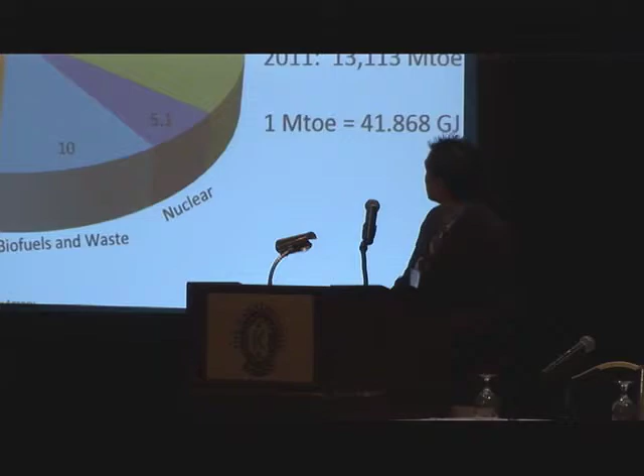Okay, I believe, there we go.

So chemical looping is an interesting technology. This presentation will differ from all previous presentations because chemical looping is still most definitely a technology that's being developed, but every sign does show that it can lead to commercial scale demonstration operations. Currently, as all these chemical looping projects occurring throughout the world continue to scale up successfully, this technology does have the ability to completely transform how fossil fuels are utilized.

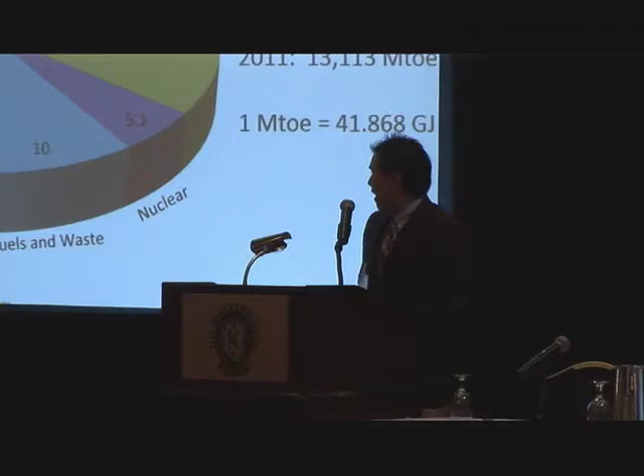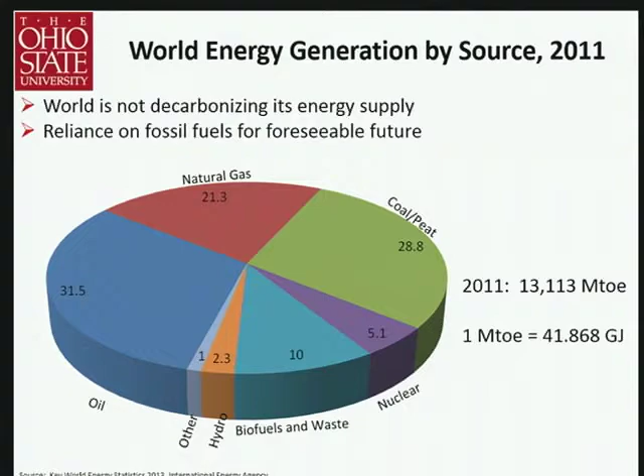First, though, it's important to take a global perspective of how energy is consumed. If you take a look at this chart, it's very obvious that fossil fuels dominate our primary energy source. Given the current portfolio for energy, oil, natural gas, and coal comprise about 80%, it's very clear that for the near future, carbonaceous fuels will continue to dominate. The world is not decarbonizing our energy, and we aren't shifting towards renewables to any great extent.

Now, I realize that CCS, CCUS, CCGS, CCUGS, whatever you want to call it, is not a viable option for reducing CO2 emissions in its current state due to economic challenges and difficulties. However, that doesn't mean that in the future it can't be or won't be, as research continually develops and advances.

So everyone here knows the purpose of CCS. Tom and Jordan did a fantastic job yesterday going over the details of what the DOE is doing in terms of CCS. But the overall strategy does require government regulation and technological advances in order for CCS to be viable.

In terms of government regulation, everyone here knows the US EPA mandates and proposals have been discussed in great detail. But internationally, the European Union has also set up the emissions trading system for CO2.

In terms of technical advances, I did steal this chart, it's quite dated, but I did steal it from the DOE NETL, so if you guys want to prosecute me, you have every right to do so. As you can see, chemical looping is here, and it does show that in terms of what the DOE and NETL believes, chemical looping provides the greatest cost reduction benefit, although we do take issue with that and believe chemical looping is more somewhere in this time frame in terms of commercialization.

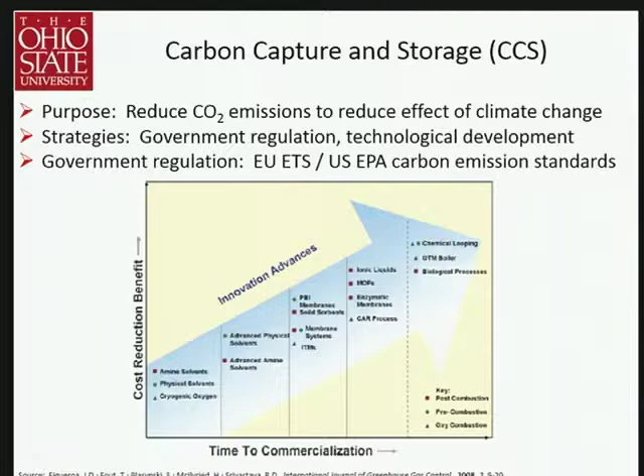So now, what is chemical looping? It's simply a cyclical process where a chemical reaction is divided into several sub-reactions using intermediates. There are two types. One is purely for CO2 removal, and the other, more interesting one, uses a metal oxide carrier particle for oxidation reduction.

In terms of CO2 capture, it's typically a metal carbonate, typically limestone. It's calcined, and then a pure stream of CO2 is emitted, while the metal oxide reacts with the CO2 and the flue gas to form the metal carbonate, and the cycle continues.

In terms of the redox cycles, what happens is a metal oxide reacts with the fuel, and depending on the metal oxide composition and the reactor type, you can get a variety of products, including syngas at any hydrogen to CO ratio you want. You just need to play around with the particle, you need to play around with the fuels, but syngas at a hydrogen to CO ratio at any desired fraction.

You can get electricity through complete combustion. You can get hydrogen. You can get liquid fuels. It just depends on how you decide to set up your reactor system. What you can see is that it's just a complete redox cycle between the metal oxide and the reduced metal.

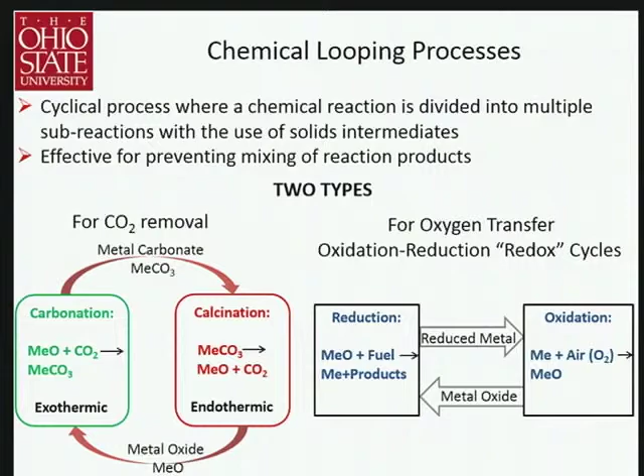The main benefits, there are several of them for chemical looping: it is an inherent CO2 capture technology. You don't need an amine scrubber, you don't need any back-end sort of CO2 removal system. It by itself is inherently a CO2 capture technology.

It provides a highly efficient method for coal and natural gas utilization, where efficiencies can range between 50% and 80%, depending on what products you want. It's fuel flexible. Research throughout the world has tested biomass, coal, natural gas, lignite, pet coke. Everything has been tested.

And it's also product flexible, like I said earlier, where if you want syngas at any hydrogen to CO ratio you desire, it can be achieved. You can produce electricity and value-added chemicals.

The challenge is the particle development. The greatest barrier and the number one failure for chemical looping systems is the particle. DuPont had a maleic anhydride chemical looping system, but it failed because their particle over time failed to continue to provide the oxygen, so they just eventually ended up using an ASU.

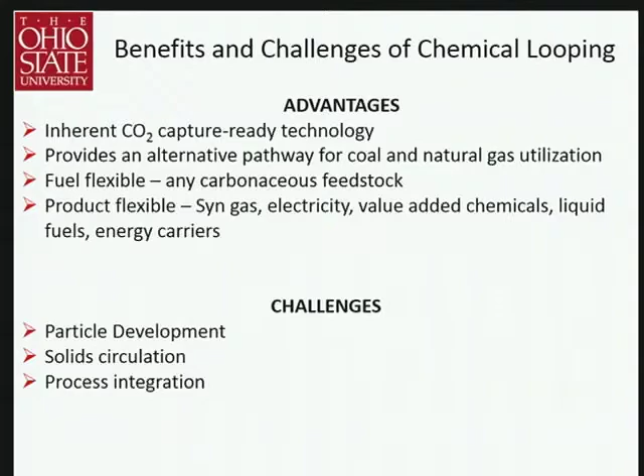The idea of chemical looping isn't a new idea. In the 1900s, the Lane and Messerschmitt process was actually a chemical looping system for hydrogen production, very similar to what we are using today for our hydrogen production as well in a chemical looping system.

The first reaction, the top one, is simply the steam iron process. The bottom reaction is the reduction of Fe3O4 back to Fe using CO. The net reaction you can see is a water gas shift reaction, but since you broke it into two intermediate reactions, there's no need for a water gas shift catalyst. There's no need for breaking the equilibrium or trying to shift it, because there is none. It's inherently performed through the chemical looping system.

In the 1970s, Consol Energy had the CO2 acceptor process, where they tried to use calcium oxide both as a CO2 carrier, such that the water gas shift reaction could move in the forward direction. Plus, since it came from the calciner, which was at a higher temperature than the gasifier, the calcium oxide also provided heat to the gasifier.

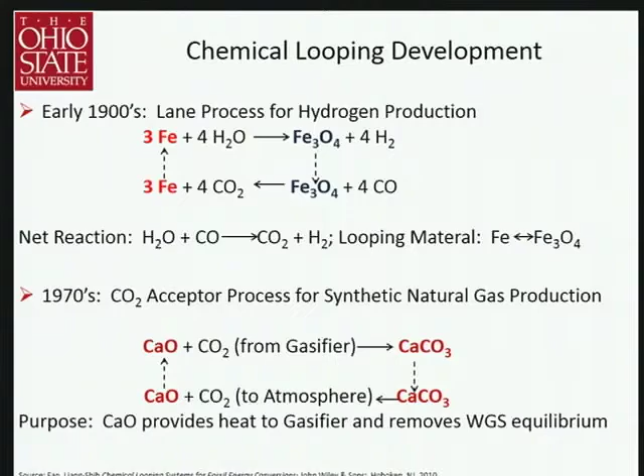So again, there are two types of chemical looping systems. The first one is for CO2 removal, and this has been studied heavily using carbonates, usually naturally occurring carbonates. RTI used sodium carbonate. The Europeans actually scaled up their process to a 1.7 megawatt thermal plant in Hunosa, Spain, using just pure plain limestone, not doped or anything, just limestone from the ground.

And what we do at Ohio State is we actually use calcium hydroxide, so we provide an intermediate reaction step to convert the calcium oxide to calcium hydroxide, and I'll go into that a little more later. Additional solids include hydrotalcites, and magnesium hydroxide as well has been studied.

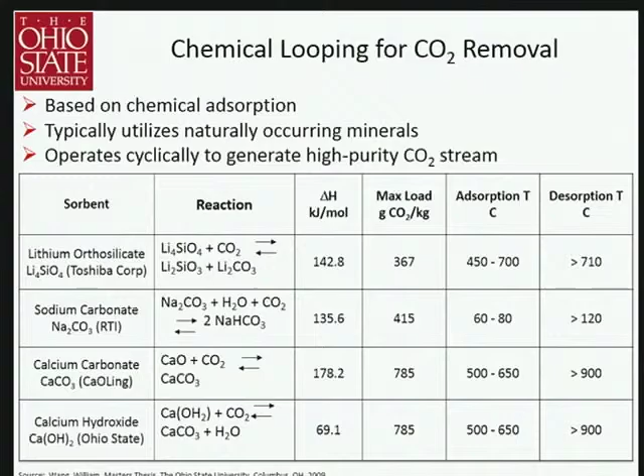So at Ohio State, we have chosen calcium hydroxide because what we've noticed is that it is far more reactive than calcium oxide over multiple cycles. Calcium oxide is known to degrade in cyclical fashion for CO2 capture, while calcium hydroxide has shown a steady CO2 removal. So it's a three-step process, three reactions, all at high temperature.

The calciner is where everything starts to form the calcium oxide. That is then hydrated using steam around 500 C, which is an exothermic reaction, so quite a bit of heat is provided through the hydrator. And then in the carbonator, that's where the CO2 capture occurs, and it continues in a cyclical fashion.

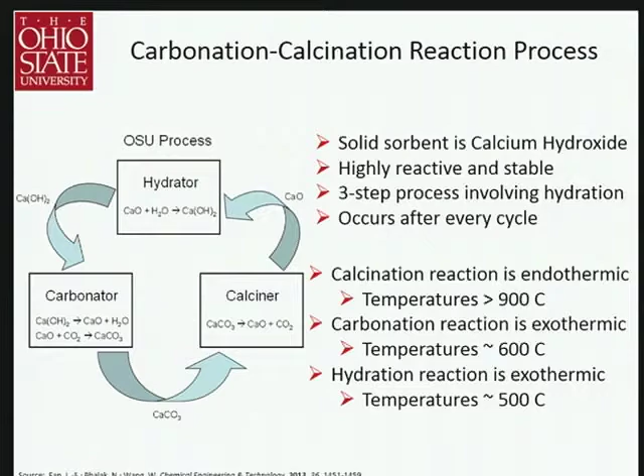We demonstrated this at the 120 kilowatt thermal scale at Ohio State using a coal-fired stoker donated by Babcock and Wilcox, using direct injection of calcium hydroxide and several other oxides into our flue gas to see the removals. This is the stoker grade Ohio coal, and this is the coal flame.

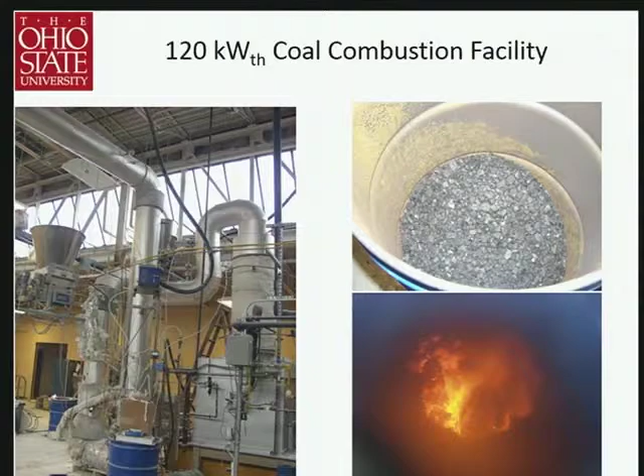The single cycle studies were very successful. Calcium hydroxide showed great promise. This was the cyclical setup where solids were injected up here and then just continued through the cycle. And this is our rotary calciner for calcination.

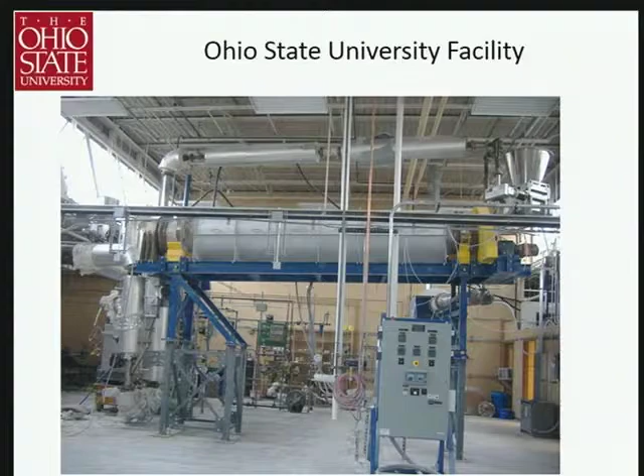What we were able to achieve is 90% CO2 removal at a calcium to carbon mole ratio of 1.3. This can be compared to natural limestone tested by the Europeans, where they need a 10-to-1 calcium to carbon mole ratio for 90% CO2 removal.

Because of the high calcium to carbon mole ratio and the carbon to sulfur ratios, we get 100% SO2 removal using calcium hydroxide, even though we're at temperatures far lower than furnace sorbent injection, and that's just because the calcium to sulfur ratio is at least 50-to-1.

In the carbonator, the residence time is on the order of seconds to achieve the 90% CO2 removal, and we've been able to sustain the reaction for several cycles. This is just a simplified process flow diagram of what is circulating through the system and the energy inputs and outputs.

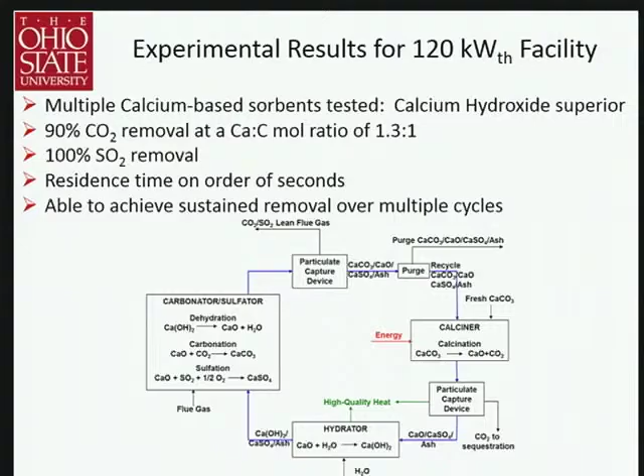I like to call this slide 'what I did over the summer.'

In order to see the effect of process parameters on the carbon capture process, the CCR process as we call it, in terms of energy penalty and materials consumption, I started out with case 11 of the DOE baseline report.

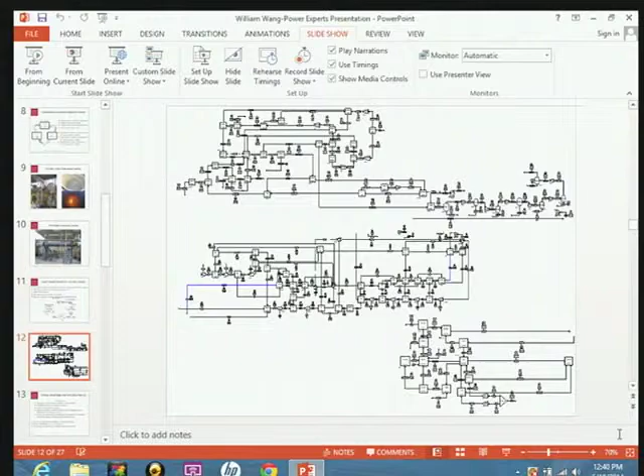So this is the coal-fired boiler here. I apologize, I had to break this up and it's still incredibly small. Coal and air are fed into here, and flue gas comes out. This is the steam turbine cycle, again for the supercritical case, case 11, along with using the QGESS standards put forth by the DOE.

And then up here is the actual carbon capture, where the flue gas comes in, and then this is the CO2 compression. This is the calciner, which operates in an oxycombustion mode, per the standards of the oxycombustion report, again put forth by the DOE, as oxycombustion calciners haven't really been developed yet.

And then the hydration obtains steam from the intermediate pressure and low pressure interchange.

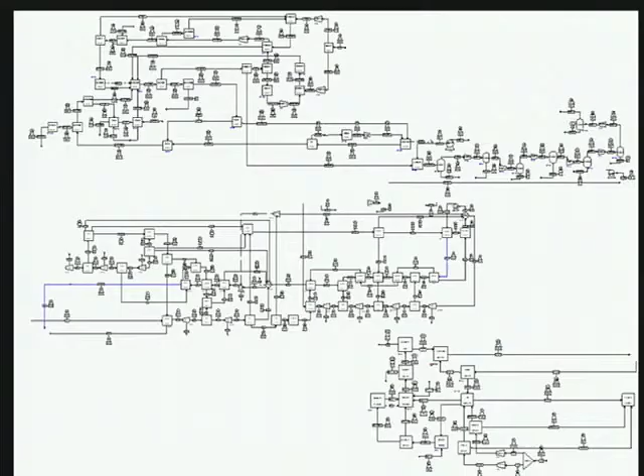The advantages of using this high temperature carbon capture process is that it uses limestone, which is about $25 a ton, very cheap if you get it closer to the mine. Because of the high calcium to carbon mole ratio of 1.3 to 1, our simulations show - we haven't formally demonstrated it - but all acid gases are removed: SO2, SO3, HCl, just because of the trace amounts present and the high amounts of calcium circulating through the system.

The process integration is flexible, where you can use either high temperature or low temperature flue gas. You can take steam from either the intermediate pressure or low pressure interchange, and if vacuum compression or vacuum heat exchangers are developed better, you can also take it from the exit of the low pressure steam turbine, but it is under vacuum at that point.

The energy penalty, steam consumption, and oxygen consumption are all lower than amine scrubbing and oxycombustion. Under the very worst case scenario, the energy penalty is around 25%, but it's usually lower, 15 to 20%, 15 to 25%. That's again because of the amount of high pressure or high temperature heat available through hydration, the heat of reaction for hydration, and the cooling of the flue gas from the carbonator coming out at 625 C down to stack temperatures.

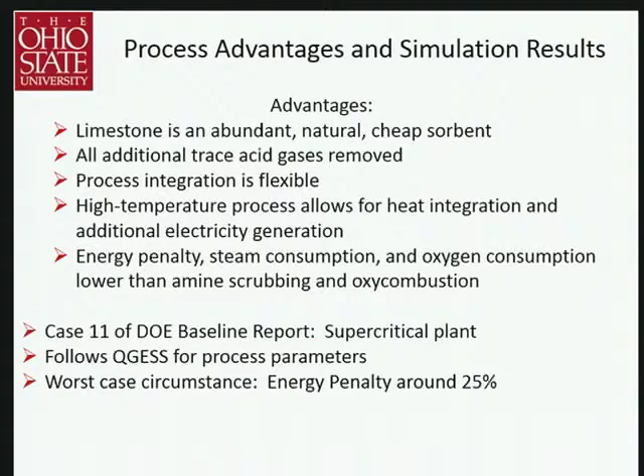The second type of calcium process is a pre-combustion one, where the calcium hydroxide now actually serves two purposes. One, it provides the steam for the water gas shift reaction upon decomposition. And second, it breaks equilibrium by capturing the CO2 and driving the reaction forward. Under the correct operating conditions, no catalyst is actually necessary to obtain high kinetics and high conversions to hydrogen.

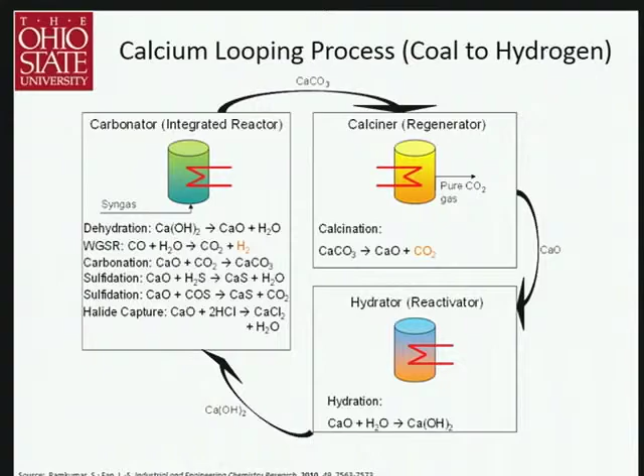That is the only difference - the calciner and hydrator remain the same. It is also a process intensification: this is a typical calcium looping process, or rather an IGCC process, where you can see all this is necessary, but because of the reactivity of the calcium hydroxide, it's reduced to this, where the calcium looping process, the three reactor system, replaces everything here.

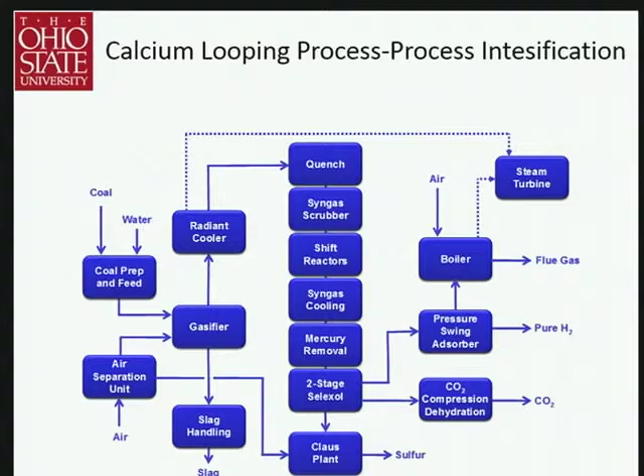Consol Energy did an independent Aspen simulation and economic analysis with our input, and they also had to make a lot of additional assumptions because they were producing so much extra electricity, they didn't know how to handle that. So the total first year cost of electricity is about $92 per megawatt hour, as opposed to the coal to hydrogen based plant. It is the lowest cost route for hydrogen production with CO2 capture: steam methane reforming plus the CLP process.

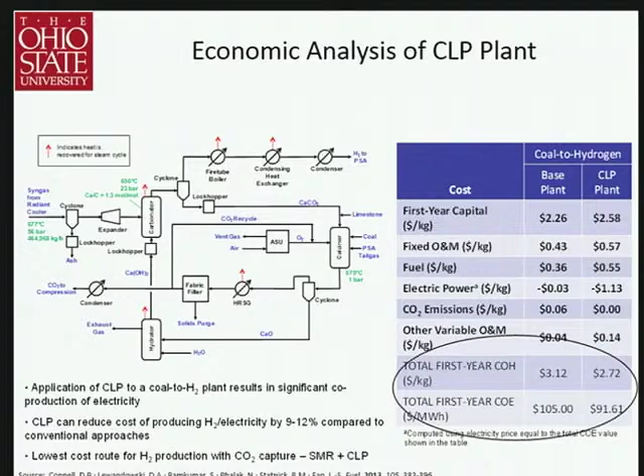Now, the more flexible and more interesting type of chemical looping is the redox one, where you have a metal oxide reacting in a cyclical loop, becoming metal oxide and metal. This is just a schematic where you can see the metal oxide enters, and then the reduced metal exits. There should be an O here.

Basically, like I said, you can produce your syngas, you can produce complete combustion products, you can produce chemicals. And what you can see over here is it's still combustion, it's just that the nitrogen is over here and the CO2 is over here, so there's no dilution of the CO2. It's inherently a CO2 capture process.

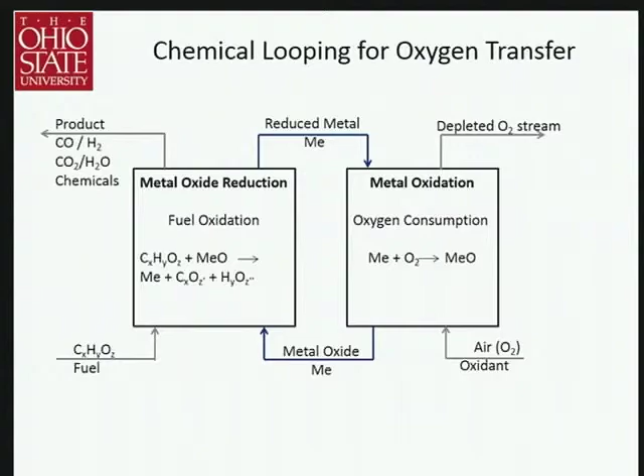Again, the most critical factor for success in chemical looping is the metal oxide. The initial composition is based on thermodynamics, and then you have to go into kinetics. What's also interesting is there is a subset of metal oxides, such as copper oxides, that upon heating will provide gaseous oxygen, as opposed to iron oxide, which remains lattice oxygen donation. So depending on if you need gaseous oxygen or lattice oxygen, you have to make your choice there. Additional considerations are environmental health effects, cyclic reactivity, strength.

Initially, the method for determining what particle to use for the metal oxide was done through trial and error, where they would just take a metal oxide, test it, see if it works. If it didn't work, they would tweak it, maybe add some additives, maybe go to a different one. Now things are becoming more scientific, where they are looking at reaction mechanisms and using density functional theory to determine the type of metal oxide to produce. It's becoming more of a catalytic science than trial and error, which is quite positive.

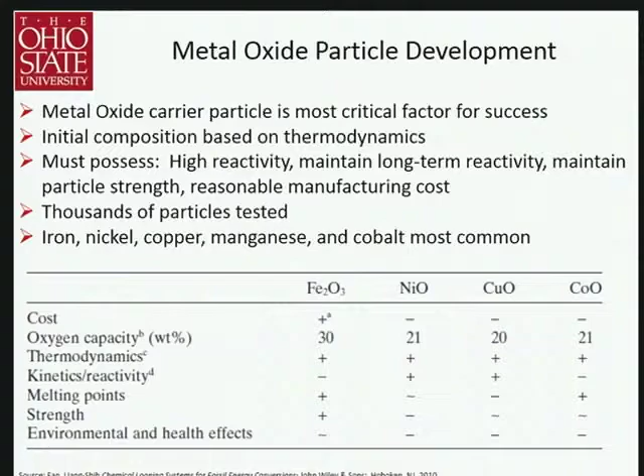So far, iron, nickel, copper, manganese, and cobalt are the most common types of metal oxides. You can also go with naturally occurring metal oxides such as ilmenite, olivine, or you can also make your own, such as iron oxide doped with something, or any metal oxide.

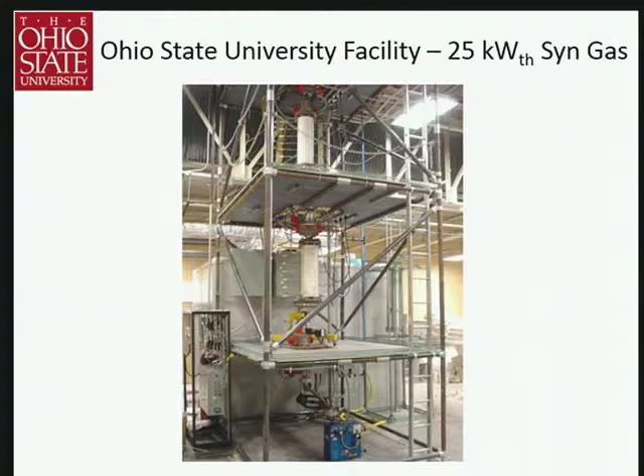We have tested over 300 hours of operation using all types of gaseous fuels. We've done methane, we've done natural gas, we've done syngas. What's interesting is also, because we use iron oxide, from Fe you can go to Fe3O4 using the steam-iron reaction to produce hydrogen, and then do a dual-step oxidation from Fe3O4 to Fe2O3 using air. So this chemical looping has the ability to produce hydrogen as well.

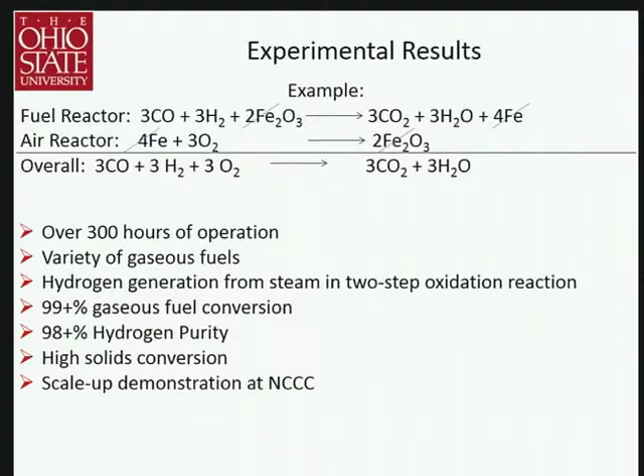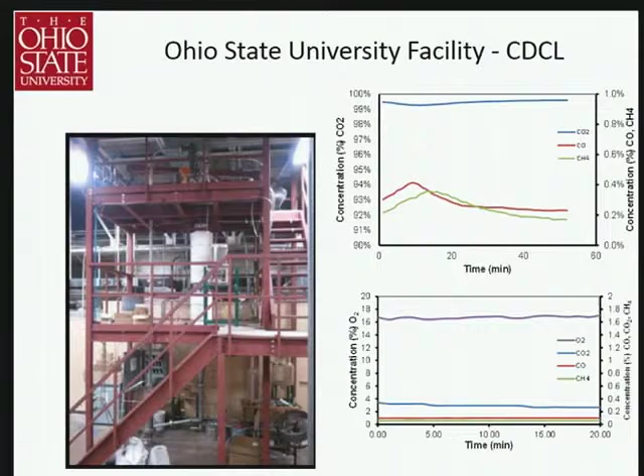We also have another chemical looping based system called coal direct chemical looping, which takes coal and reacts it with iron oxide. Again, you can form carbon monoxide, generate your syngas, generate your hydrogen, generate your electricity. We have been able to successfully demonstrate this for 200 continuous hours with absolutely no issues in terms of solid circulation, conversion, or operations. We were able to do it for 200 hours continuous in the fully integrated unit.

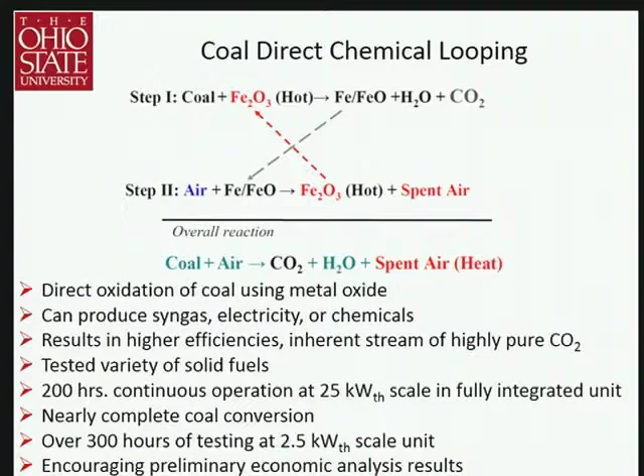We have tested coal, biomass, petcoke, lignite, PRB. Everything is fully functional. There have been no operational issues. This has the ability, again, to use coal. So this idea of retiring coal plants, there are alternatives that do exist with encouraging preliminary economics. Of course, further testing is always necessary.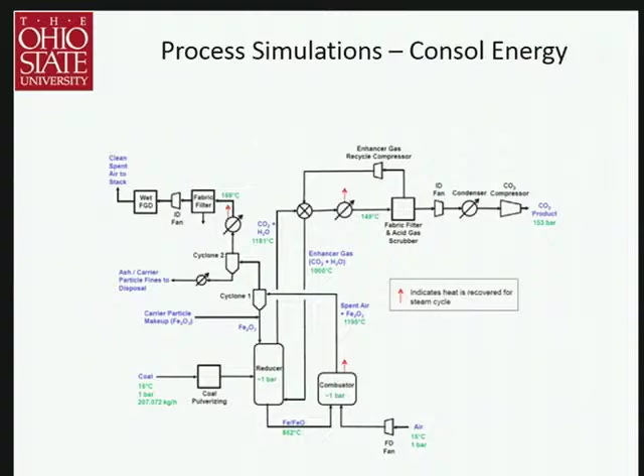Consol Energy has done their own independent economic analysis, starting with their own Aspen simulations using our experimental data. As you can see, the base plant is about 58.9. CDCL plant is about 78.4. It's less than a 35% increase in cost of electricity for preliminary economic analysis. What's really encouraging is that the energy penalty is only 10.6%.

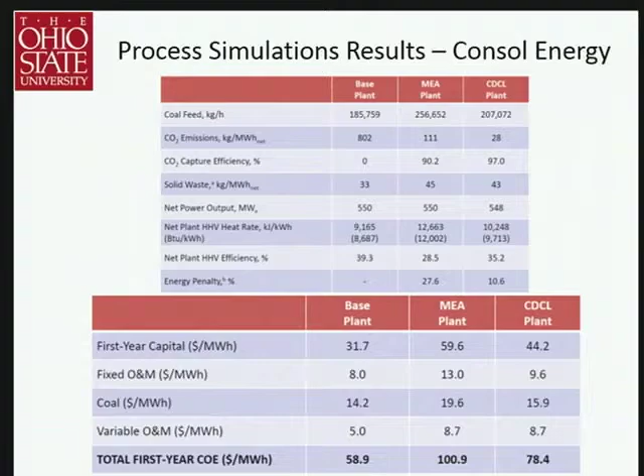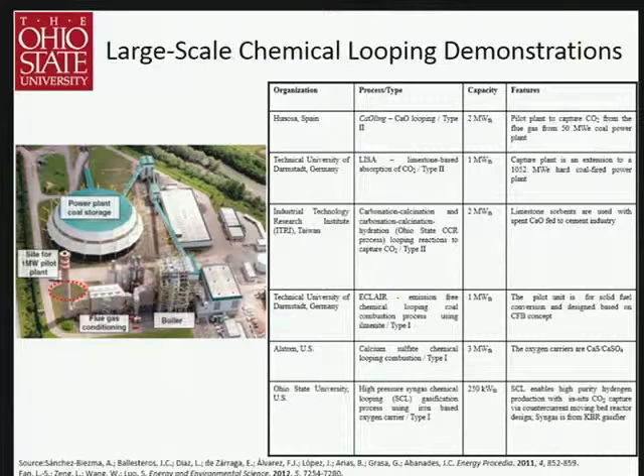In terms of additional chemical looping systems occurring throughout the world, this is the 1.7 megawatt thermal post-combustion CO2 capture using calcium oxide in Hunosa, Spain, but also Darmstadt University, ITRI, Alstom - they also have large-scale demonstrations occurring. In addition, you have universities such as University of Kentucky, University of Utah, and private companies also looking at chemical looping cycles. All the results to date are very encouraging for continued fossil fuel utilization and transformations in ways that are far from traditional.